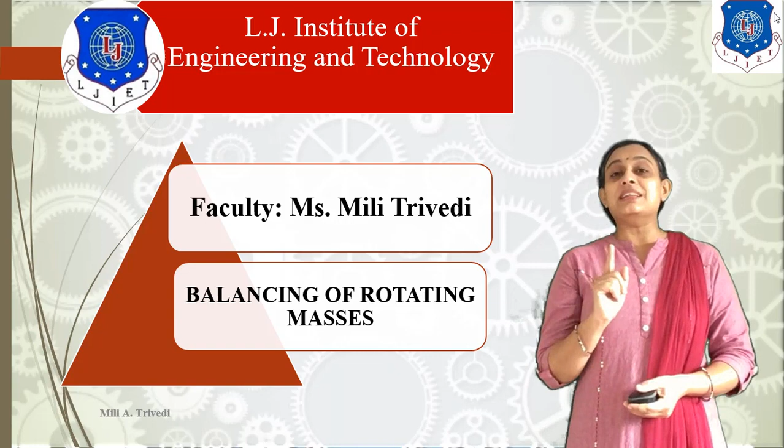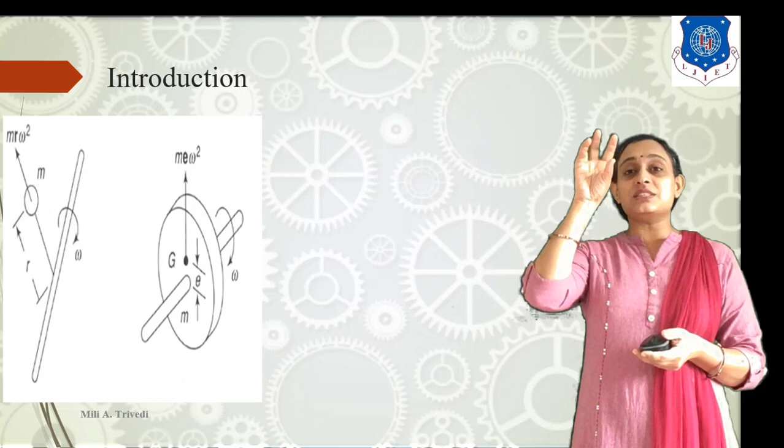So here in this diagram, what will happen? The system will rotate with omega angular velocity. If it is rotated at omega angular velocity, the mass which is rigidly fixed to the system will also rotate with omega angular velocity. And how much centrifugal force is generated? M omega square r. Now I think this is clear for you.

Let us assume another system. The system has a shaft, and there is a rotor. So instead of a single mass, what do we consider? A bunch of mass. So here there is a rotor. Now the rotor has eccentricity E. Now what is the eccentricity? It is none other than the radius. It will represent the CG, the center of gravity, of the system in our case.

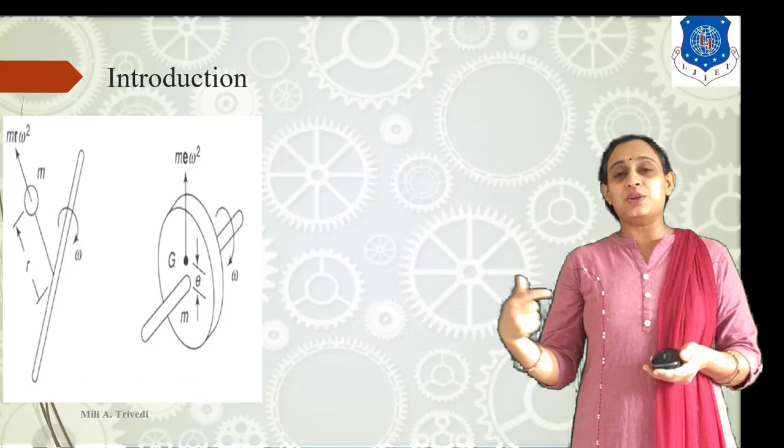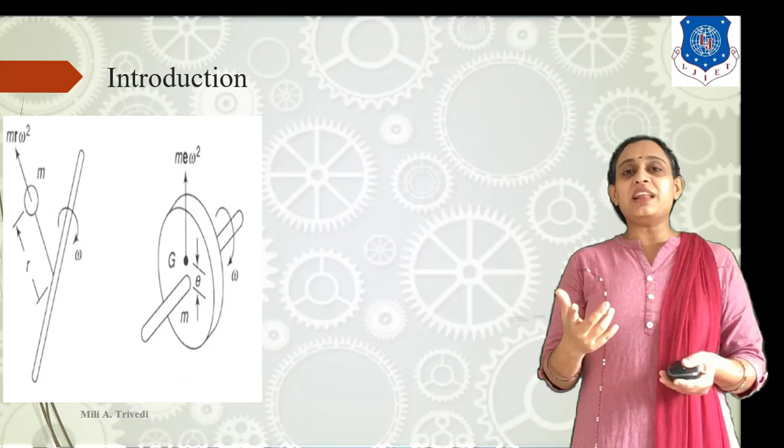Then what will happen? If the shaft is rotated at omega angular velocity, the rotor itself rotates with omega angular velocity, and because the CG is slightly deflected, the total force of the system will not lie on the axis of the shaft. It will lie on the rotor CG. And because of this, the shaft will be bent.

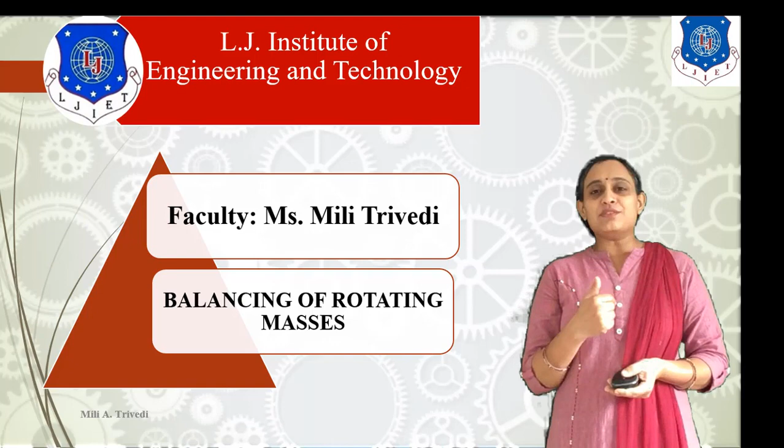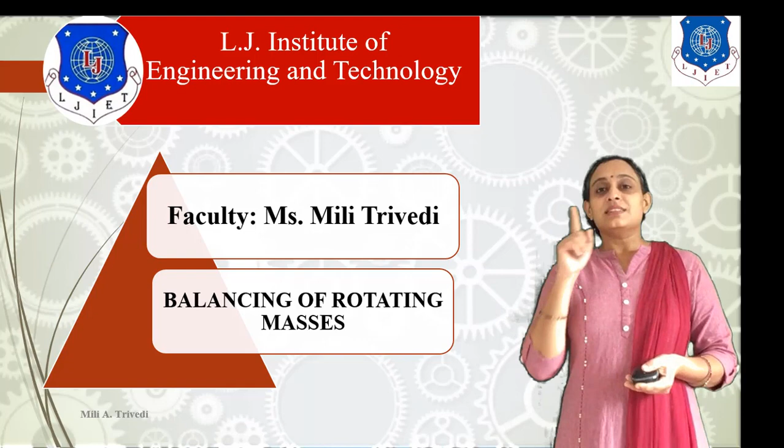Okay, now we have to balance the system. So what will we do to balance the system? We have to manage that the CG of the system, I repeat, the CG of the system should lie on the axis of rotation. And the second thing is we need to balance the mass.

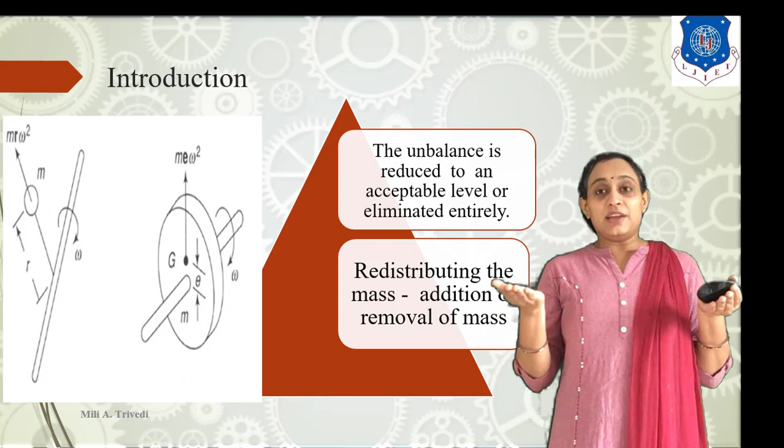It means if there is greater mass towards the upward side, we have to put another mass to balance it. You know the seesaw. What is in the seesaw? There is the right hand side and on the other side, the left hand side, there is your friend. You need to balance the system. Likewise, if both masses are on the same plane, on the same axis, on the same line, the system is balanced.

Okay, now this is like static balancing. Let us look at static balancing. As you remember the seesaw example, if you are at the right hand side and your friend is at the left hand side, and the distance is the same, and if any one of you is heavier, the seesaw will be bent towards that direction. Now if we need to balance it, we have to reduce the radius or reduce the mass. It is just applicable in our system.

As you see in our chart, what is static balancing? For static balancing, the resultant force, or the effect of all the forces, should be on the axis of the shaft. It means the axis of the shaft will remain steady. Next, the center of gravity should be on the axis of rotation. It means there should not be any kind of fault in the system. Next, the combined mass should also be on the axis of rotation. It means we have a statically balanced system.

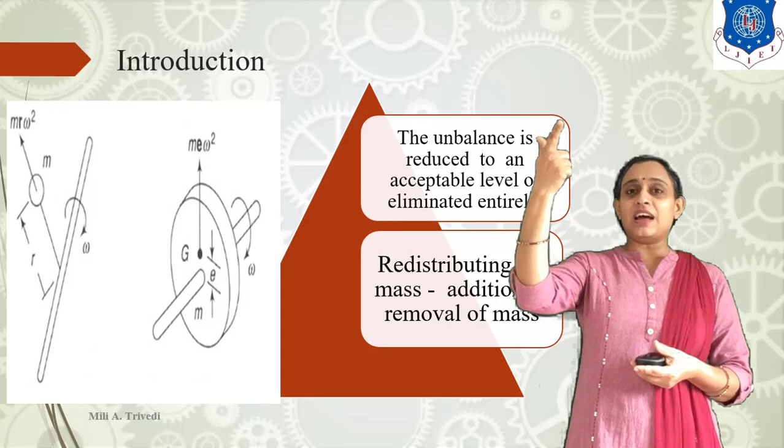As you see in our previous slide, the mass is at radius r, and this system is an imbalanced system. What do we do for balancing? We have to put the same or a different mass, at the same or a different angle, and we will get total balancing. It means M1R1 should be equal to M2R2 in our case. So this is for static balancing. The prime value should be the force F, sigma of all the forces.

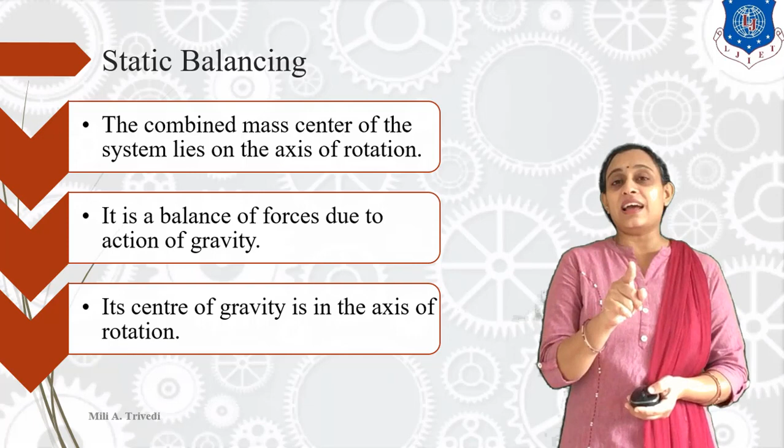The sum of all the forces should be 0 with respect to the static balancing system. Now next is a dynamic balancing system. In dynamic balancing we need to consider all the forces by which the system is rotated, and all the moments which are created by the forces.

It means for the system, what we have to do? Forces should lie on the axis of rotation and the sum of all the moments of all these forces should be 0. So, for dynamic balancing, what is the prime value? Sigma F should be 0. Sigma of moment should be 0. So force should be 0 as well as moment should be 0.

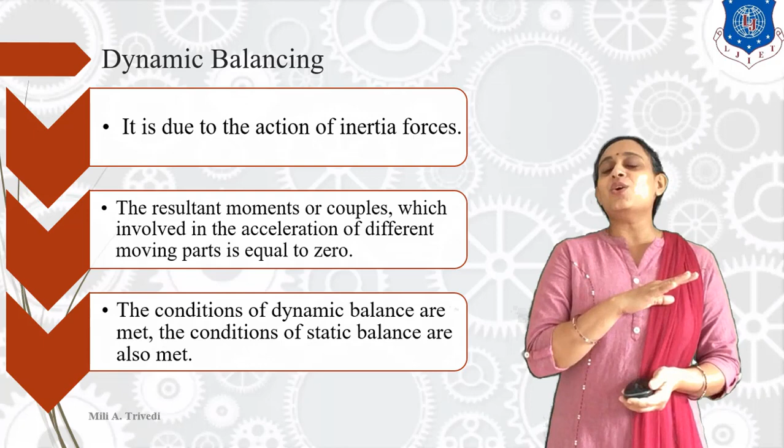So, for static balancing, the sum of all the forces should be 0. It should be balanced. And for dynamic balancing, forces 0 is the primary condition, and the couple or moment should also be 0. So this is the introduction of static and dynamic balancing.

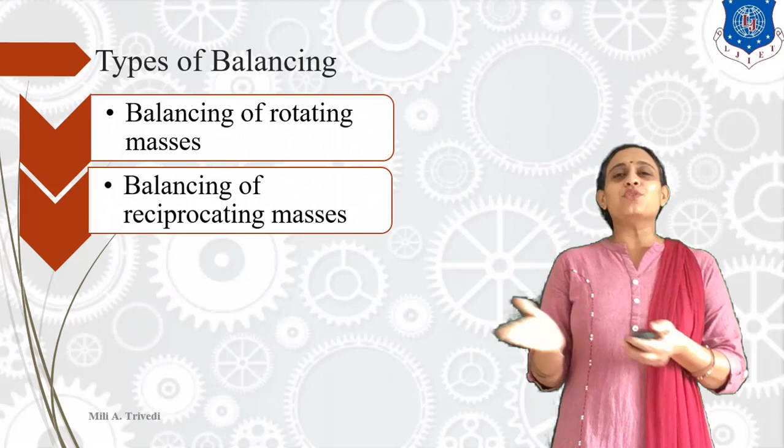Now let us have the types of balancing. We have two types of balancing. One is a rotating mass system and the second one is the reciprocating mass system. We say balancing of rotating masses and balancing of reciprocating masses. In our case, let us study balancing of rotating masses, rotated in the same plane.

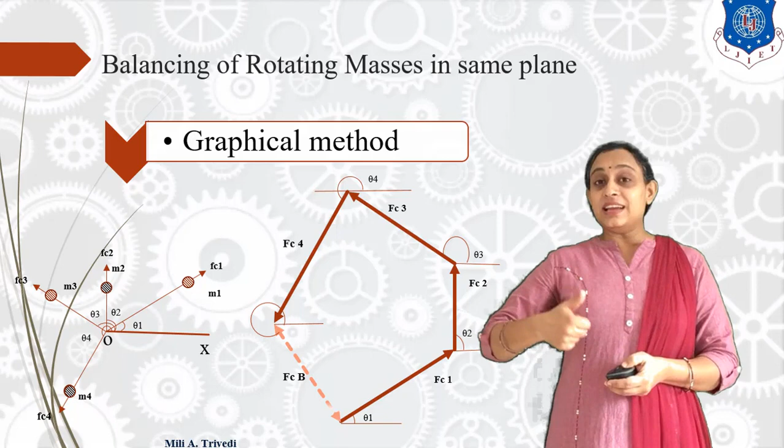Okay. So here in the upward direction, I represent 2 arrows, one for the resultant and one for the balancing one. Now in this case, the resultant one, as we all know how to draw the resultant, is in the opposite direction. It means the combination of all the forces will have the effect in the upward direction, and this force is in the second quadrant. If you see from the baseline of theta 1, it is in the second quadrant. This will give us the resultant force value of all these forces.

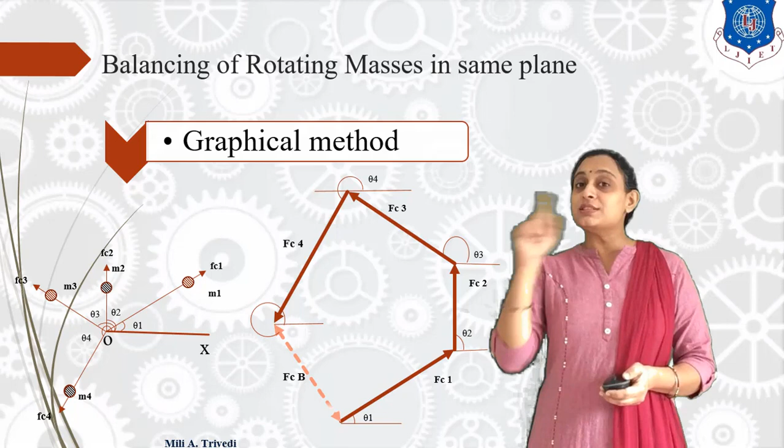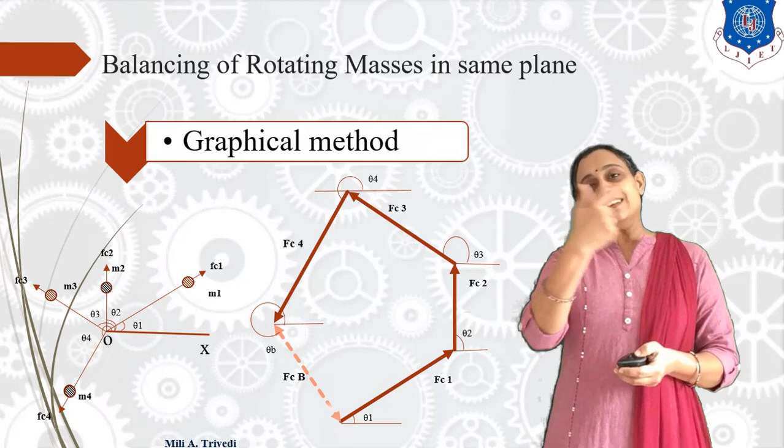What we need to do? We need to balance all these forces. Now, we have to draw the same line, but the arrow should be in the downward direction, opposite to the resultant force. Okay? So here, we will get the downward direction arrow, and as you see the angle representation, from the baseline of FC4, we have to mark the angle. It means if the resultant is in the second quadrant, we will get the balancing force in the fourth quadrant. Balancing force is always opposite to the resultant force. And then we will get the value of balancing masses. So here we will get our values.

Now, according to our system, as you see in this case, we have to draw the vectors. If we draw the vectors from tail to head, the next vector will be started from the head itself. It means suppose FC1 has its head at theta 2, so FC2 will be started from the head of FC1. Same as FC3 will start from the head of FC2. And then if the polygon is closed, the system is balanced. If the polygon is open, the system is imbalanced. And if the system is imbalanced, we need to balance it. Clear?

Now, in this step, we have to measure the length of that dotted line. That dotted line will represent the resultant and balancing force. Resultant in the second quadrant and balancing in the fourth quadrant. We have to find out the balancing one, so here we have to consider the fourth quadrant vector. Now measure that. Because we draw all this diagram in centimeters, we will get the value in centimeters itself.

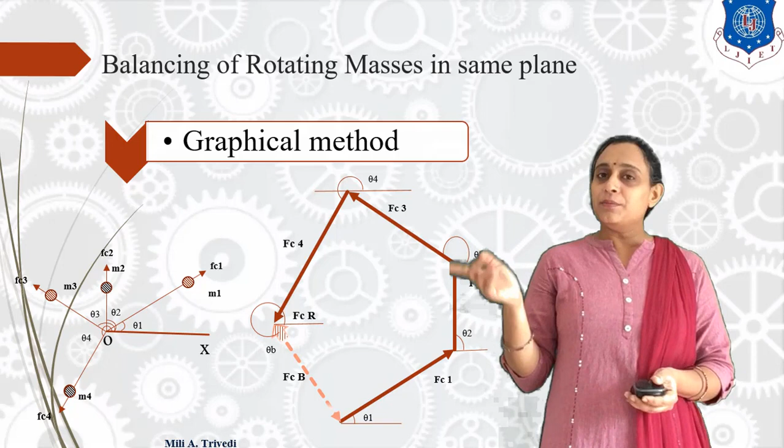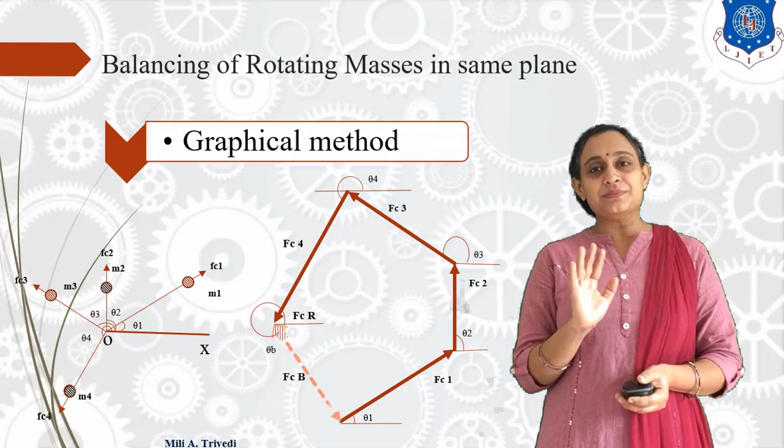Suppose in our case we know the radius of the balance mass, where we need to put the balance mass. If we know the radius, what we can do? Balance force FCB is equal to our answer, 5 kg meter. FC is M into R, so if we know the radius R, we will directly get the value of mass M. Okay. This is the graphical method for our system.